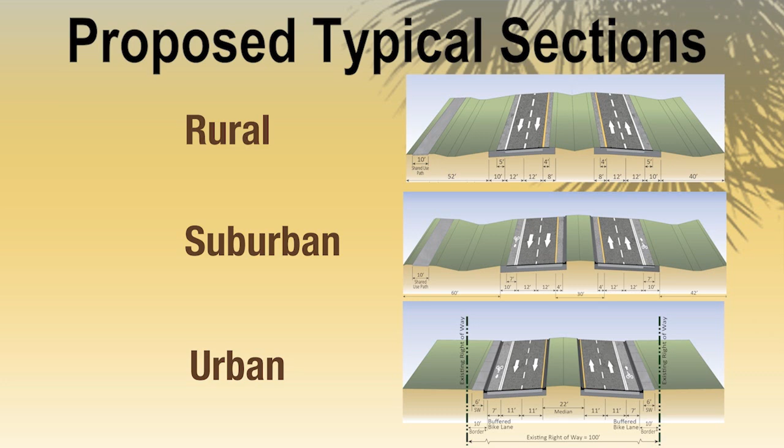Throughout this PD&E study process, FDOT has looked at many different concepts to widen the existing two lanes of State Road 29 to four lanes through downtown Immokalee, as well as potential new alignments east and west of Immokalee. At each phase of the process, FDOT conducted a public meeting to provide an update on the project's status and to take comments from the public and local agencies. After environmental and engineering analyses and public and agency comments, many of these alternatives were eliminated.

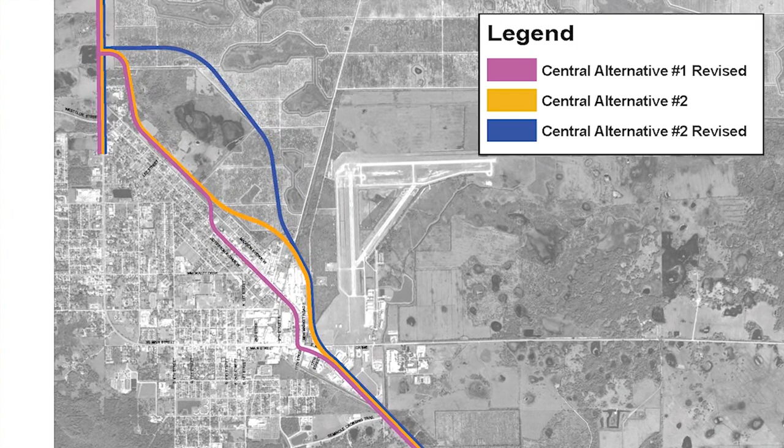The last public meeting was an Alternatives Public Workshop held on November 9, 2017. At that meeting, we asked for your input on three proposed build alternatives within the project limits: Central Alternative 1 Revised, Central Alternative 2, and Central Alternative 2 Revised. Based on your comments and additional environmental and engineering analyses, we selected Central Alternative 2 as the recommended build alternative for State Road 29.

Currently, the majority of the State Road 29 project corridor operates at or above the FDOT levels of service C and D adopted for the roadway. Only a small segment of the project corridor from New Market Road to State Road 82 operates below the adopted standard. If no improvements occur to the roadway, the State Road 29 project corridor is anticipated to operate under deficient conditions, with most segments operating at level of service F by the 2045 design year, thus resulting in an unacceptable level of service for the existing roadway.

This evening, the FDOT is presenting two alternatives for State Road 29 within the project limits: the recommended build alternative and the no-build alternative. Please review the boards on display this evening showing the alternatives and their impacts in detail. The recommended alternative, or Central Alternative 2, follows existing State Road 29 from the start of the project at Oil Well Road to north of Seminole Crossing Trail.

From this point, the recommended alternative travels north from State Road 29 on new alignment along the west side of the Immokalee Regional Airport to avoid impacts to the commercial and industrial areas of Immokalee and the State Farmers Market to the west. It then turns to the northwest, just past Gopher Ridge Road, to parallel Madison Avenue and New Market Road. It then travels along the east side of the Collier Health Services Medical Center and the Florida State University College of Medicine before reconnecting to State Road 29 north of Westclox Street, New Market Road West.

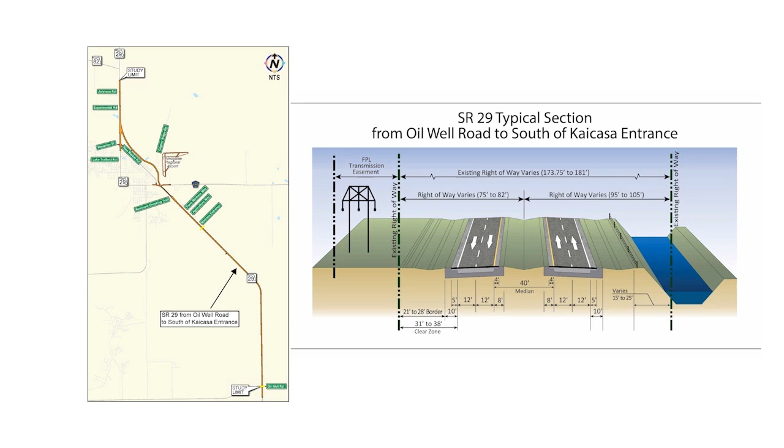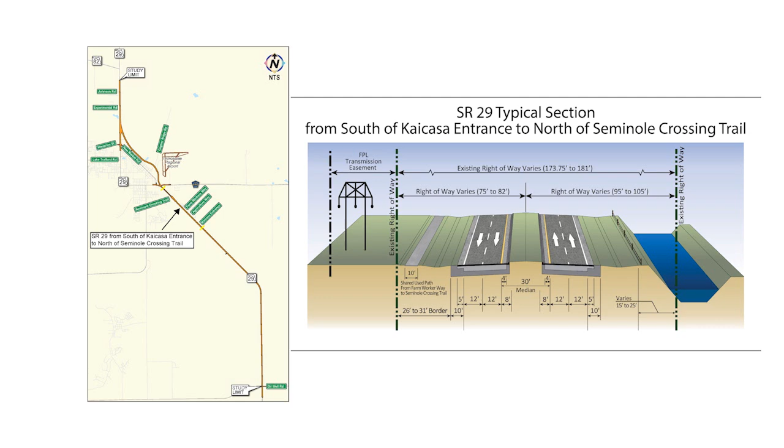compensation sites. From south of the Kaicasa entrance to north of Seminole Crossing Trail, the proposed typical section consists of a 4-lane divided roadway with two 12-foot travel lanes in each direction, separated by a 30-foot raised median with a 10-foot shared use path on the west side of the roadway from Farm Worker Way to Seminole Crossing Trail. There are roadside ditches to handle stormwater runoff. This typical section can be constructed within the existing right-of-way, with the exception of the canal relocation near Seminole Crossing Trail and stormwater ponds and floodplain compensation sites.

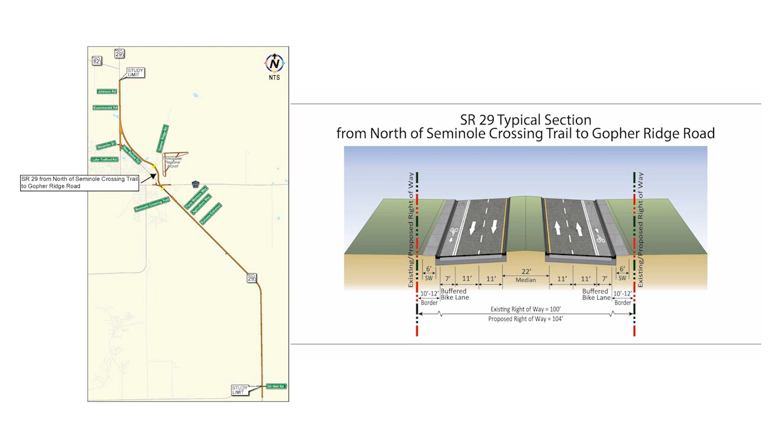The proposed typical section from north of Seminole Crossing Trail to Gopher Ridge Road consists of a 4-lane divided roadway with two 11-foot travel lanes in each direction, separated by a 22-foot raised median with 7-foot buffered bicycle lanes and 6-foot sidewalks in each direction. There is a closed drainage system with curb and gutter. This typical section can be constructed within the existing right-of-way, with the exception of some additional right-of-way needed for a turn lane near 13th Street, plus right-of-way for stormwater ponds.

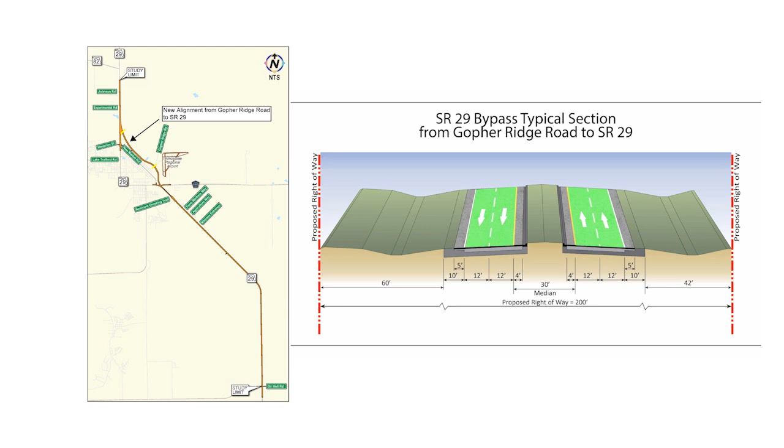From Gopher Ridge Road to State Road 29, the proposed new alignment typical section consists of a 4-lane divided roadway with two 12-foot travel lanes in each direction, separated by a 30-foot raised median. There are roadside ditches to handle stormwater runoff. This typical section will require 200 feet of right-of-way for the roadway, plus right-of-way for stormwater ponds.

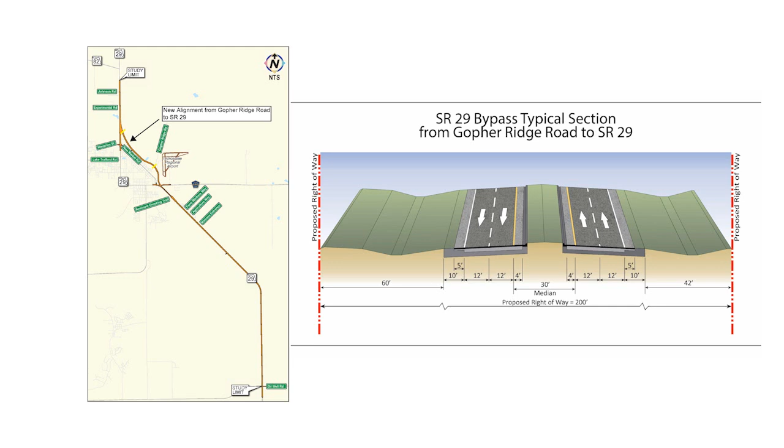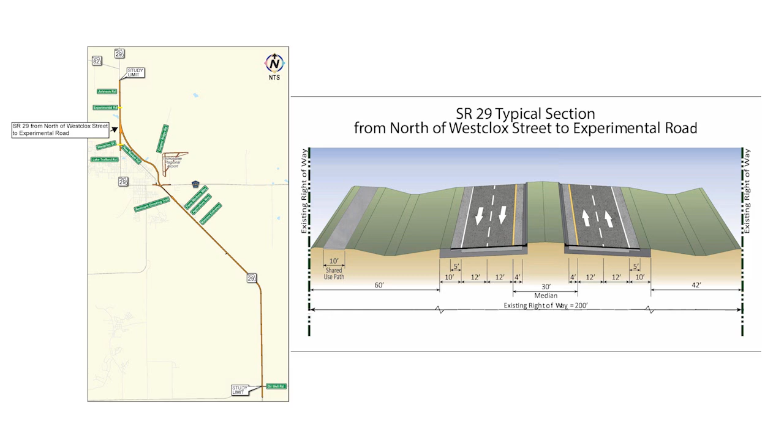The proposed typical sections for State Road 29 from north of Westclox Street to south of State Road 82 consist of a 4-lane divided roadway with two 12-foot travel lanes in each direction, separated by a 30-foot raised median from north of Westclox Street to Experimental Road and a 40-foot grassed median from Experimental Road to south of State Road 82. A 10-foot shared use path is proposed on the west side of the roadway. There are roadside ditches to handle stormwater runoff. The roadway typical section can be constructed within the existing 200 feet of right-of-way, but additional right-of-way will be required for stormwater ponds and floodplain compensation sites.

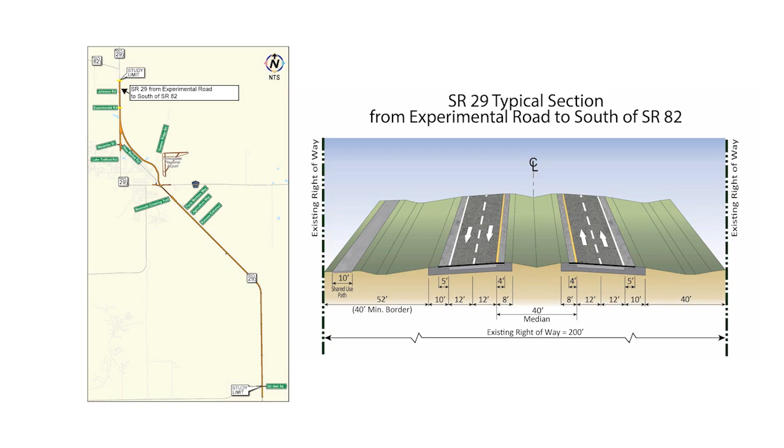In accordance with Rule 14-97 of the Florida Administrative Code, the proposed improvements will include a median to control the movements or access of turning traffic. State Road 29 falls under Access Management Classification 3. These changes are presented in compliance with Section 335.199 Florida Statutes, Transportation Projects Modifying Access to Adjacent Property.

To comply with the National Environmental Policy Act of 1969, or NEPA, FDOT will consider the no-build alternative as a valid alternative throughout the study process. The no-build alternative assumes that no major improvements are made to State Road 29 within the project limits through the design year of 2045, except for routine maintenance. The advantages of the no-build alternative include no construction costs, no disruption to traffic due to construction, no disruption to adjacent property owners due to construction, no right-of-way acquisitions or relocations, and no degradation or disruption of natural and other environmental resources due to construction.

Disadvantages of the no-build alternative include increased traffic congestion causing increased road user costs due to travel delay, not consistent with the local transportation plans, increased potential for vehicular crashes due to congested lanes and intersections, increased emergency vehicle response times, increased potential for crashes between vehicles and pedestrians or bicyclists due to inadequate sidewalks and bicycle lanes, and increased vehicle emission pollutants due to higher levels of traffic congestion.

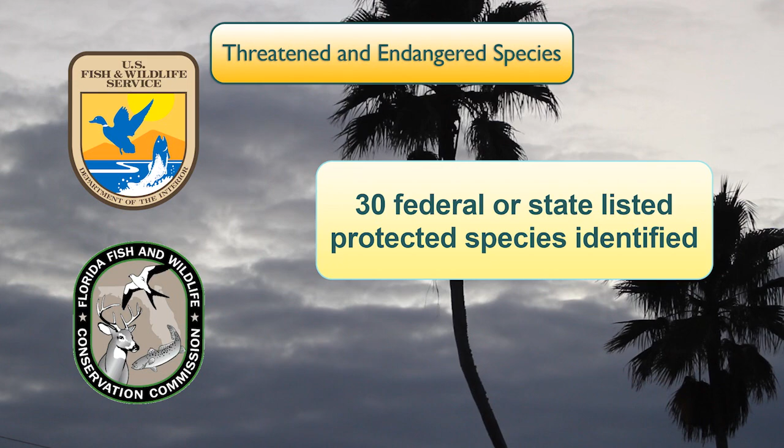Threatened and endangered plant and animal species are afforded special protection under the Endangered Species Act of 1973 as amended and Florida statutes. Through evaluation of various datasets in coordination with the U.S. Fish and Wildlife Service and Florida Fish and Wildlife Conservation Commission, a total of 30 federal or state-listed protected species were identified as having the potential to occur within the project area.

Of these species, the agencies determined that the proposed project may affect, but is not likely to adversely affect, 6 federal species, including American alligator, eastern indigo snake, Florida bonneted bat, wood stork, Audubon's crested caracara, and the snail kite. 2 federally listed species, the Florida scrub jay and the Florida panther, may be affected and are likely to be adversely affected. 1 state-listed species, the gopher tortoise, may be affected but is not likely to be adversely affected.

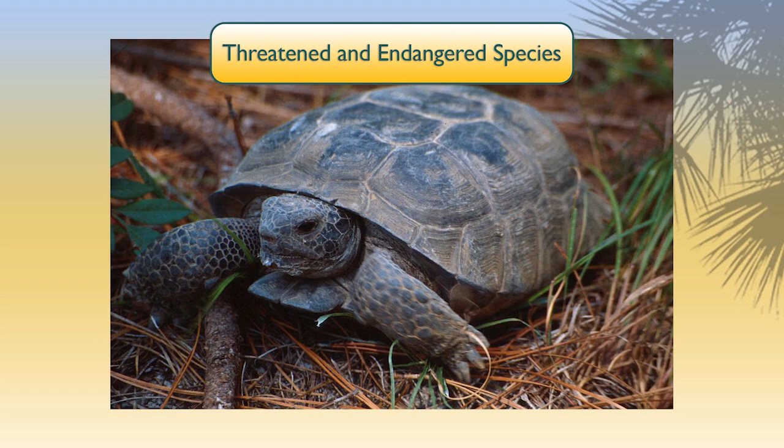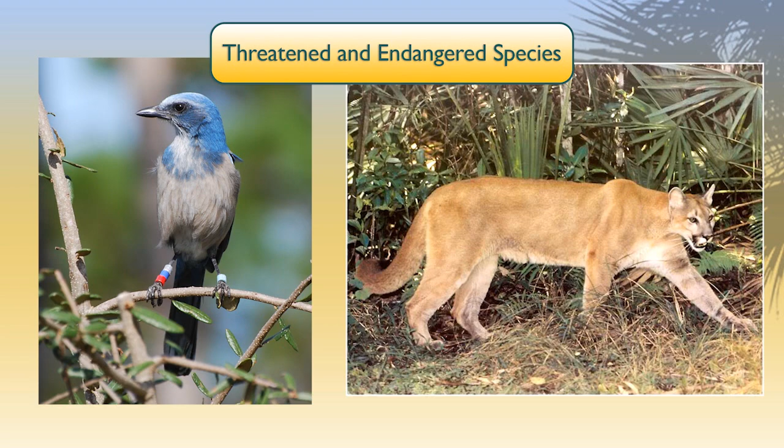To comply with Section 7 of the Endangered Species Act of 1973 as amended, the FDOT has committed to reinitiating consultation with the U.S. Fish and Wildlife Service during the project's design and permitting phase for the Florida scrub jay, Florida panther, and all other species for which a may affect but is not likely to adversely affect determination has been made.

As part of the coordination with both U.S. Fish and Wildlife Service and Florida Fish and Wildlife Conservation Commission, the FDOT will implement various measures to minimize and mitigate impacts to any federal or state protected species. Furthermore, the FDOT will continue to consult with environmental agencies in future project phases to meet all environmental permitting and construction requirements.

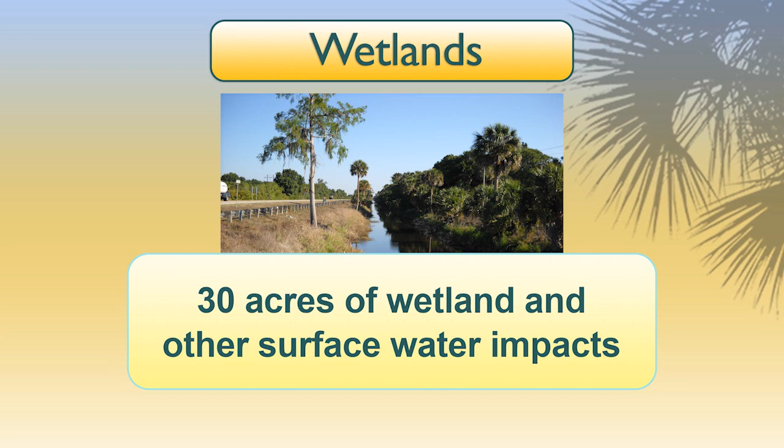The project team has evaluated this project for wetlands involvement. The proposed improvements will result in approximately 30 acres of wetland and other surface water impacts. The recommended alternative includes all practicable measures to minimize harm to wetlands. Wetland impacts resulting from construction of this project will be mitigated to meet Florida statutes and the U.S. Code.

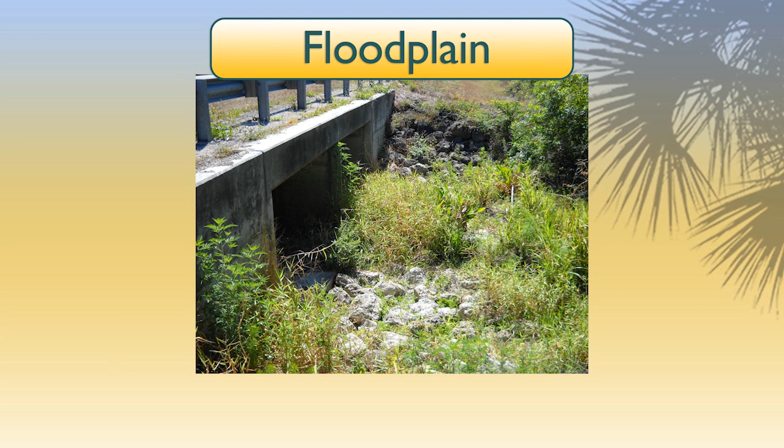The project has been evaluated for potential floodplain involvement. Even though the project is located within the 100-year floodplain, there will be no significant change in flood risk, and minimal impacts are expected to the 100-year floodplain. A water quality impact evaluation was performed. The proposed stormwater facilities will be designed to meet the current requirements of the South Florida Water Management District.

The project team evaluated effects of traffic noise associated with the recommended alternative. None of the 100 evaluated noise-sensitive receptor sites along the project corridor are predicted to experience future traffic noise levels that approach, meet, or exceed the noise abatement criteria for their respective activity category. None of the evaluated sites will experience a substantial increase in traffic noise above the existing conditions as a result of the proposed project. Therefore, noise abatement measures were not considered for the noise-sensitive sites identified adjacent to the recommended alternative. Traffic noise specialists are here tonight to answer any questions.

The project is located in an area which is designated attainment for all of the national ambient air quality standards under the criteria provided in the Clean Air Act. Therefore, the Clean Air Act conformity requirements do not apply to this project, and no significant impact is expected on air quality. This project is expected to improve traffic flow by adding capacity to relieve congestion, which should reduce operational greenhouse gas emissions. Minimal short-term air quality effects may be caused from construction of the proposed improvements, such as dust from earthwork or unpaved roads and smoke from open burning. The FDOT will adhere to all state and local regulations and to the standard specifications for road and bridge construction.

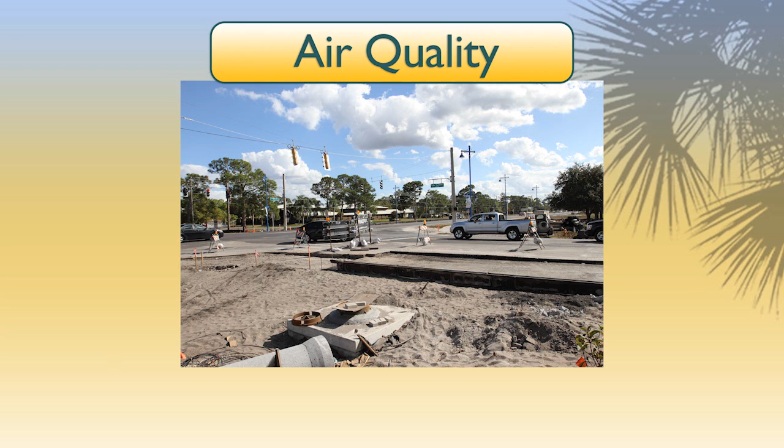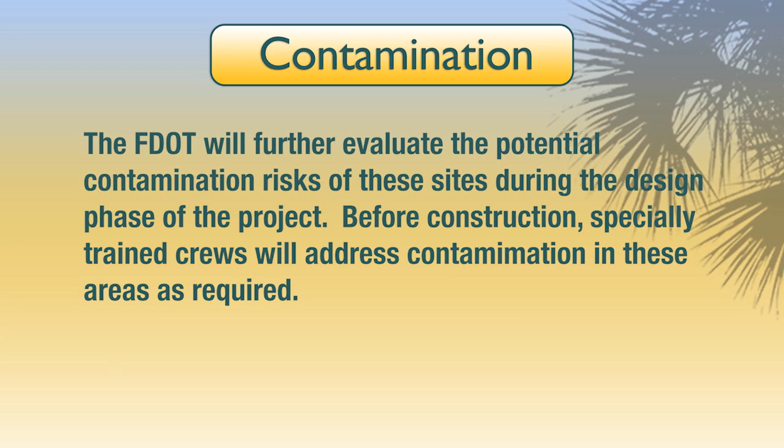A contamination screening analysis was performed for the project, which identified 28 sites with the potential for medium contamination involvement and 3 sites with the potential for high contamination involvement. The FDOT will further evaluate the potential contamination risks of these sites during the design phase of the project. Before construction, specially trained crews will address contamination in these areas as required. Locations of these sites are shown on the concept plans displayed this evening.

A cultural resource assessment survey was conducted in accordance with the National Historic Preservation Act of 1966 and Florida statutes. Archaeologists and historians identified no archaeological sites and 46 historic resources in the project area. One resource is individually eligible for listing in the National Register of Historic Places, the Immokalee Ice Plant. The State Historic Preservation Officer determined that there would be no adverse effect to the ice plant, and no significant historic properties identified would be adversely affected by the proposed improvements.

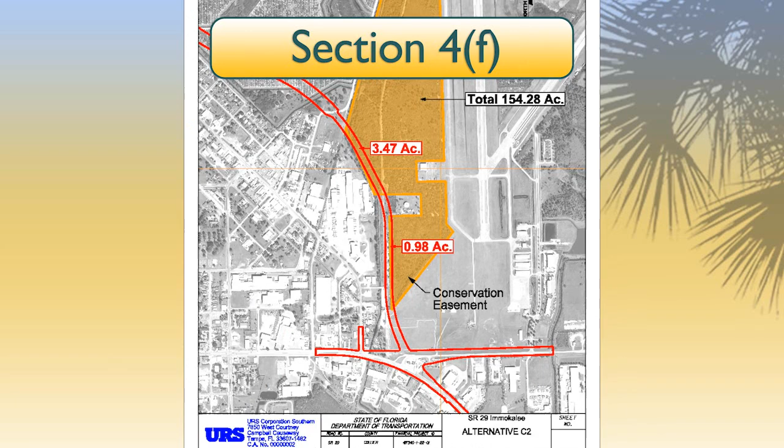The project team examined the project area for publicly owned properties that may be affected under Section 4(f) of the Department of Transportation Act of 1966. The Immokalee Airport Park and the Immokalee Airport Conservation Easement are Section 4(f) resources. The recommended alternative will require permanent use of approximately 0.27 acre of the Immokalee Airport Park and 4.45 acres of the Immokalee Airport Conservation Easement. These impacts will occur at the edge of each property.

Based upon the overall minor level of impact and implementation of proposed mitigative actions to address potential impacts, the project will not adversely affect the activities, features, and attributes of each property in meeting its intended Section 4(f) purpose. As such, FDOT is pursuing a Section 4(f) de minimis finding for the potential impacts to each resource. This information is available for review at the public hearing tonight.

The hearing provides the opportunity for public comment on the project's use of the Immokalee Airport Park and the Immokalee Airport Conservation Easement. As determined by the Natural Resources Conservation Service under the U.S. Department of Agriculture, or USDA, the recommended alternative impacts approximately 160.5 acres of farmlands of prime or unique importance. Due to the project effects being below the significance threshold, no further consideration of protection is needed, no additional corridors need to be evaluated, and no additional coordination with the Natural Resources Conservation Service is required.

Construction of the recommended alternative will require additional right-of-way. One of the unavoidable consequences on a project such as this is the necessary relocation of families or businesses. On this project, we anticipate the relocation of one business, however, no residential relocations are expected. All right-of-way acquisition will be conducted in accordance with Florida Statute 339.09 and the Federal Uniform Relocation Assistance and Real Property Acquisition Policies Act of 1970, commonly known as the Uniform Act. Brochures that describe the FDOT's Relocation Assistance Program and Right-of-Way Acquisition Program are available. FDOT right-of-way representatives are available this evening to assist you and discuss the program.

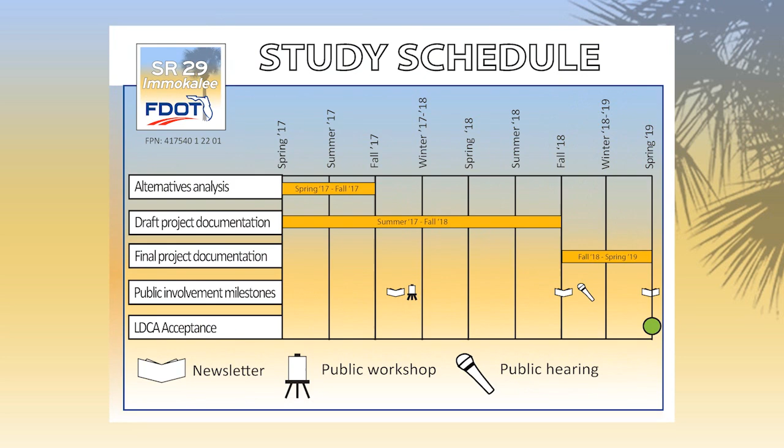Comments will be evaluated and, where feasible, may be incorporated into the conceptual design. A final determination of the recommended alternative will be submitted to the FDOT Office of Environmental Management for approval, which is expected in the spring of next year. FDOT representatives are here this evening to answer your questions, listen to your comments, and seek your input. They're wearing name badges for identification. We invite you to speak with them and to review the aerial photos, poster board displays, and project information handout.

This public hearing is held in accordance with the Federal-Aid Highway Act of 1968 as amended, Title 23, United States Code 128, Title 40, Code of Federal Regulations, Parts 1500 to 1508, Title 23, Code of Federal Regulations, Part 771, Section 120.525, Florida Statutes, Section 335.199, Florida Statutes, Section 339.155, Florida Statutes, Rule 14-97 of the Florida Administrative Code, and the National Environmental Policy Act of 1969 as amended. It also fulfills the requirements of Executive Orders 11988, Floodplain Management, and 11990 pertaining to protection of wetlands, whereas the opportunity for early public review and comment is offered for projects proposed to be located in floodplains and wetlands. Floodplain involvement and wetland impacts are associated with this project.

The hearing was advertised and is held consistent with federal and state requirements. The hearing is conducted in accordance with the Americans with Disabilities Act of 1990 and with Title VI of the Civil Rights Act of 1964 and related statutes. Anyone who feels that they have been discriminated against with regard to race, color, religion, sex, age, national origin, disability, or family status may complete one of the forms located at the sign-in table and mail the completed form to the address listed on the poster board.